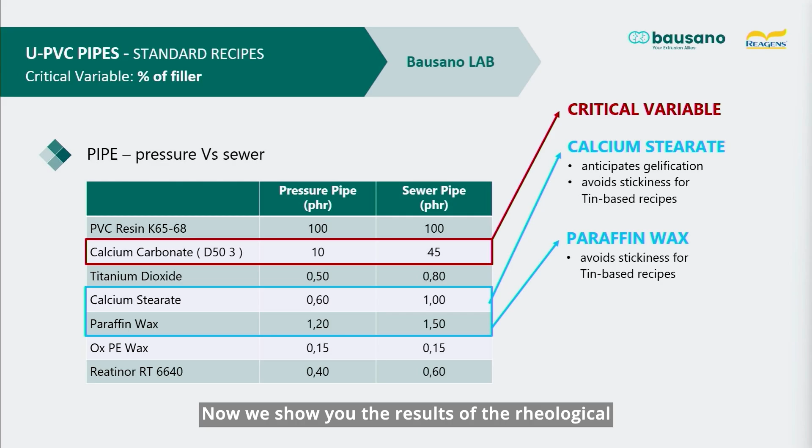Now we show you the results of the rheological characterization through the Brabender plastograph. Here we have in red the graph related to the sewer formulation, and in blue the graph related to the pressure formulation.

As we can see, conventionally the melting time, which is proportional to the melting energy required to get the whole gelation or melting of the material inside the measuring chamber of the plastograph, is the point where the graph changes slope, and the torque value on the Brabender rotor starts decreasing up to constancy.

Here on the vertical line we have highlighted the two melting times in two different cases. As we can see, there is an important gap between the melting time of the pressure and sewer formulations. This difference is due especially to the higher amount of calcium carbonate in the case of the sewer pipe.

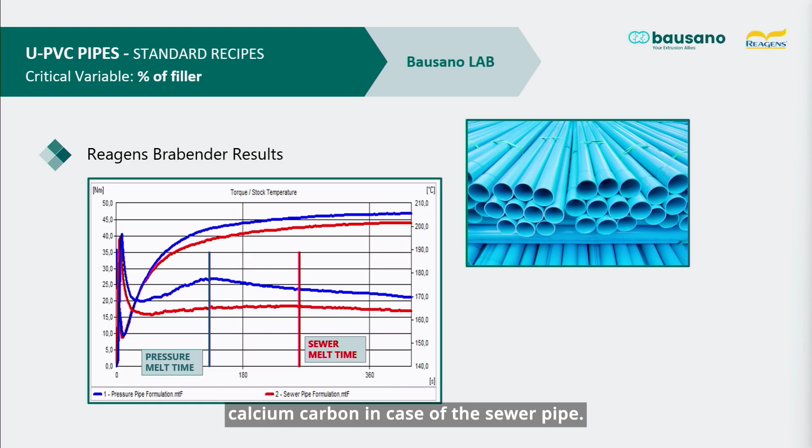Okay Alessandro, I have a question for you. I'm wondering, what is the implication if we have an early gelation or a delayed gelation? Do we get better quality with an early gelation or a delayed one?

This is a good question. Thank you, thank you Giorgio, for this question. Yeah, I wouldn't like to talk about better or worse quality.

In this case, according to the gelation time or gelation energy required from every single specific material, we have to configure a different extruder in terms of barrel length, or in terms of screw design. Usually for higher melting time or energy, we need a longer barrel, and high compression and shear screws.

For anticipated, so for short melting time, usually we use a short L/D ratio and low compression screw. Of course, it can affect the quality when we process the material on the wrong extruder.

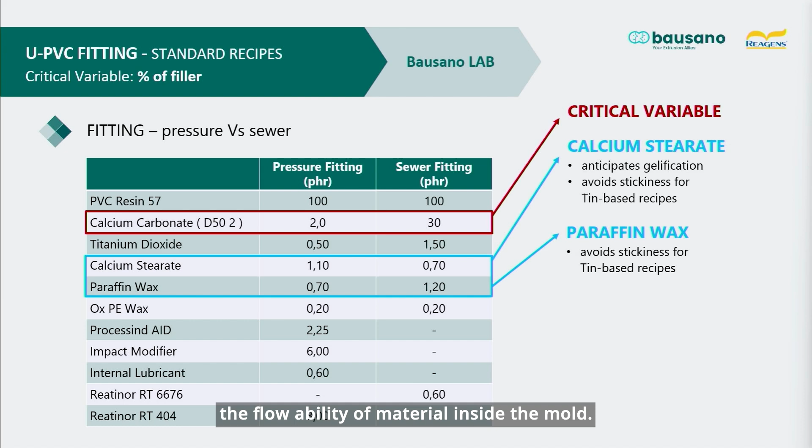Then from the table we see that, together with the usual additives that we also have for pipe, here in this case for fitting we have added impact modifier, processing aid, and internal lubricant, and especially this last one is needed in order to increase the flowability of material inside the mold.

Actually, Alessandro, I have another question for you. Sorry about that. I'm just thinking, if I'm correct, adding paraffin wax and calcium stearate is going to improve the quality in the gelation. But I'm thinking, cost-wise, could this have too high an impact using this kind of additives? This is another good question. Of course, this could be very interesting for the viewers and our customers. Thank you, they are very interested in the cost of formulation.

Of course, adding those additives in a certain amount represents a cost for our customer. But at the same time, those additives allow customers to go on working with the same recipes, for example in this case tin-based stabilized recipes, without any problem of stickiness or reduction of quality of material. And it could be important also in terms of costs, because, for example, they are not forced to switch from tin-based stabilizer to calcium zinc stabilizer, which in certain cases or for certain markets can represent a higher cost for the plant. So it has a cost, but comparing with the cost of changing stabilizer, it's much better. Exactly, thank you.

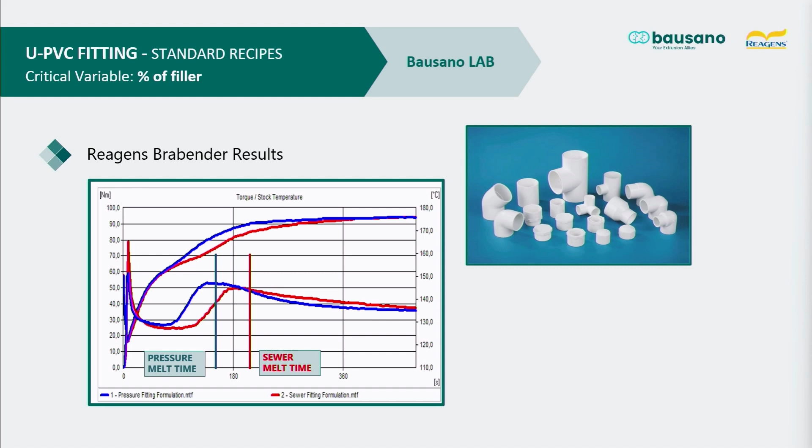Now I give the floor to my colleague here, Andrea Basolo. Thank you, Alessandro. So the next topic of this webinar is another family of PVC compounds: the unplasticized PVC compound for window profiles.

So in this case we have a PVC resin K66. It means that we need long molecular chains because we need good mechanical properties. We have for that a small addition of calcium carbonate, just 10 parts. It means that we need some more stiffness, but we don't want to compromise the mechanical properties of the profile. We have some titanium dioxide to give the white color, and impact modifier, obviously again, to have good mechanical properties.

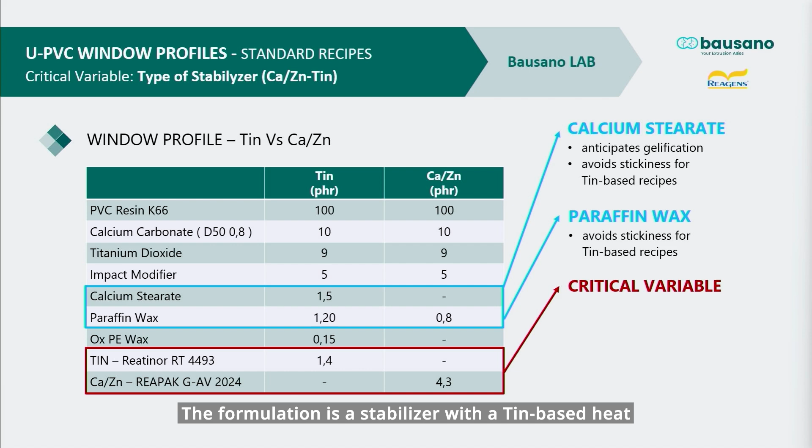But what we found as the critical variable in this case is the heat stabilizer. In the first column, the formulation is stabilized with a tin-based heat stabilizer. In the other column, you see a calcium zinc heat stabilizer. What is different is what you see underlined in blue, the components used for lubrication, because, as Alessandro said before, tin-based heat stabilizer makes the melt more sticky, so you can undergo the problem of the material tending to stick on the screws.

It passes inside the calender gaps between the two screws in a counter-rotating twin-screw extruder, and so the mechanical work is higher. So we need to increase, let's say, the lubricants.

In this case, for example, we add calcium stearate, paraffin wax, and some oxidized polyethylene wax. In the other case, with the calcium zinc heat stabilizer, we work on a one pack, meaning that, as the name says, in one pack you have the calcium zinc stabilizer and all the lubricants. In this case we have a small addition of paraffin wax, but with just one component you can replace 4 components. It's also easier while mixing all the powders.

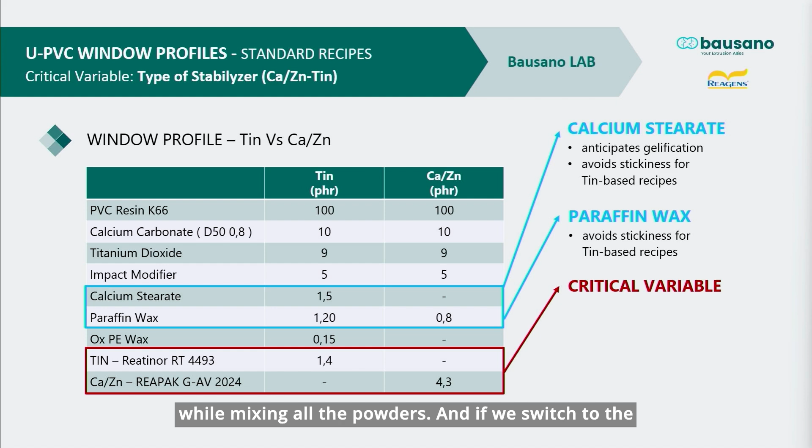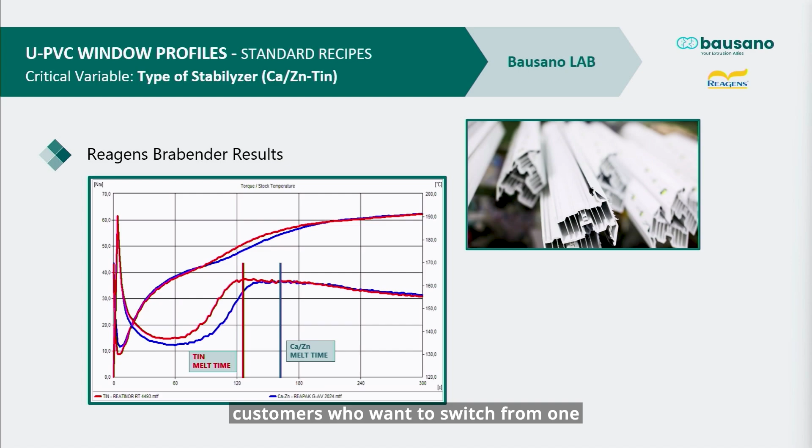If we switch to the other slide, in which we see the Brabender results, we have a gap between the two vertical lines. This means that with calcium zinc, you have a slightly longer time needed to completely plastify the material. But if you look at the shape of the curves, it's similar, and that's quite obvious because the formulation is made for customers who want to switch from one compound to the other without changing the screws.

Obviously, if I am a producer of profiles, I would like to work all the formulations on the same machine. That's why the formulations are pretty similar. Now we switch to another field, that is the medical field.

One, the DOP or DEHP, which, let's say, in some fields can still be used, but there are many and many restrictions every year because it has been found to be harmful for human health.

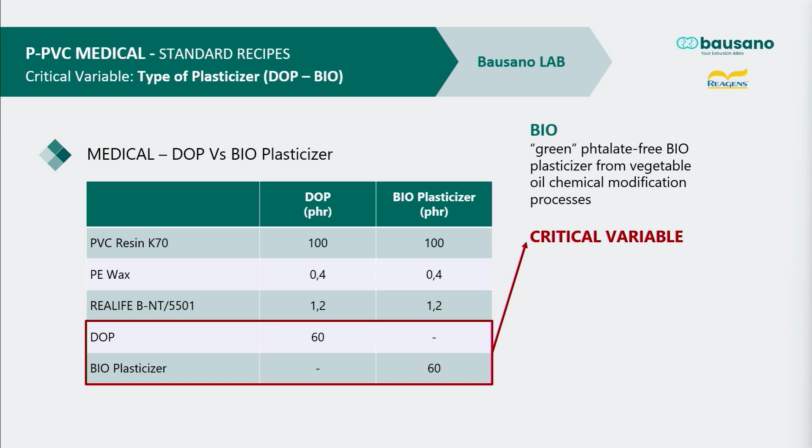BIO plasticizer is, let's say, a derivative of epoxidized soybean oil, but with some modification to the chemical structure in order to avoid one of the main troubles we have with soybean oil, that is the exudation when high concentrations are reached. And so that's why we have this comparison.

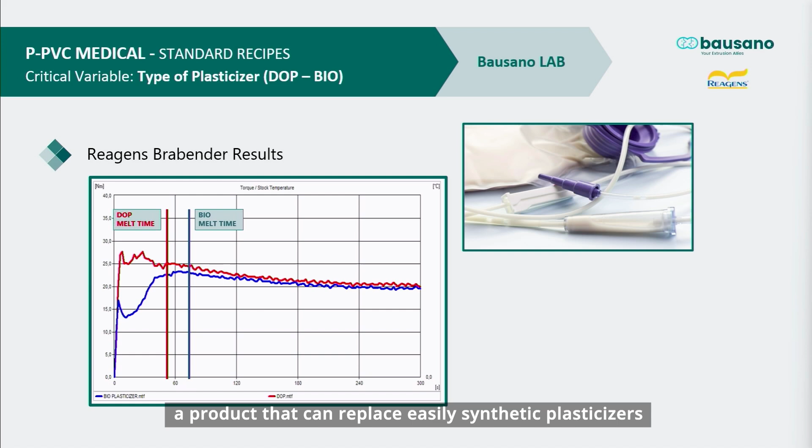Also in this case, if we see the comparison between the Brabender graphs, we see that the melting time is slightly higher with the bioplasticizer, but again the difference is not so high, because this plasticizer has been thought of as a replacement, also as a green replacement—one whose production does not rely on oil and so on. So the aim is to make a product that can easily replace synthetic plasticizers without significant problems for the producer. So again, I leave the floor to Alessandro, and we go on with some conclusions.

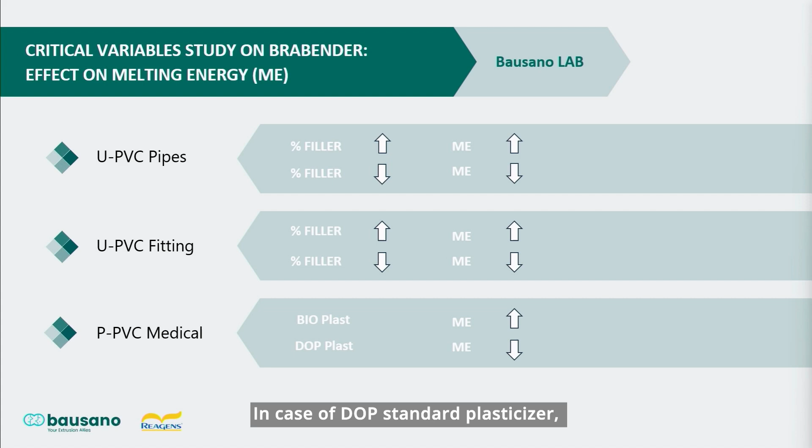For UPVC fitting, basically we have the same trend: the higher the percent of filler, the higher the melting energy required to get proper gelation or melting of the material. In the case of plasticized PVC medical, we have a direct correlation between the kind of plasticizer used and the melting energy, because the plasticizer is the only variable that affects it, if you remember the formulations. With the bioplasticizer, we have a higher melting energy required to reach full gelation of the analyzed samples. In the case of DOP standard plasticizer, the melting energy decreases.

Now let's talk a little bit about the Bausano method.

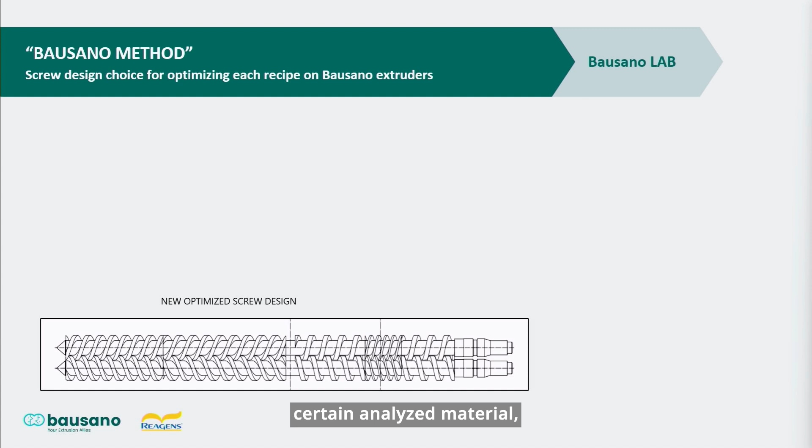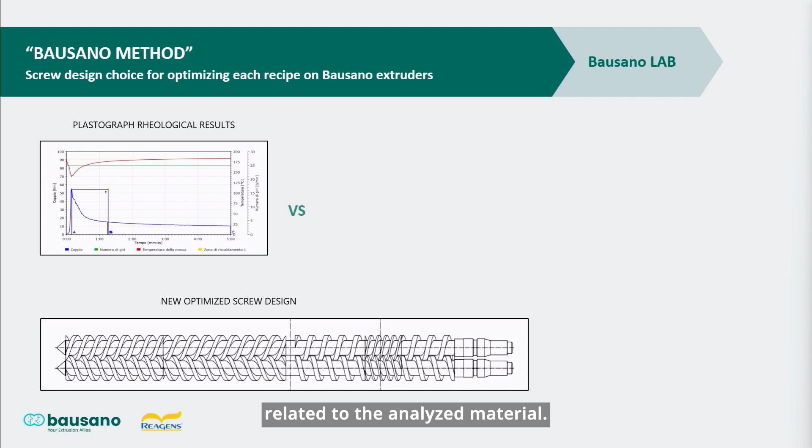When we have to configure a brand new screw design for a certain analyzed material, we start from the Brabender graph related to the analyzed material. Then we check all the screw designs that are already existing in our huge database, because it's really huge. We're talking about more than 75 years of experience of Bausano, maybe even more. We have our database full of different screw designs.

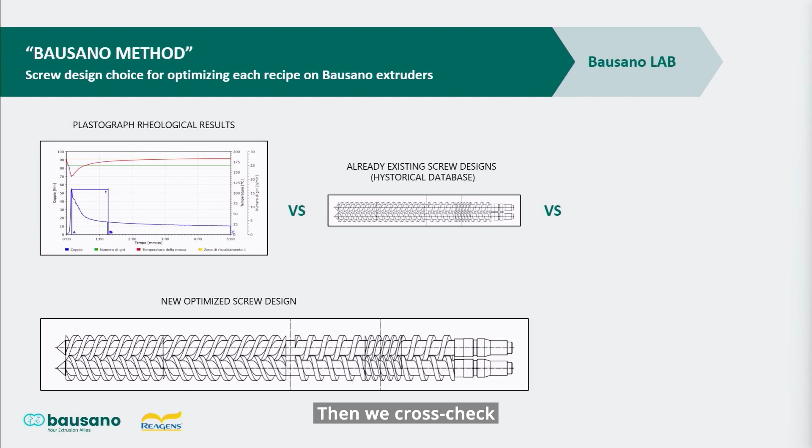Then we cross-check this database with the feedback that our customers gave us relating to the material that they usually process on our screws. From this cross-analysis, we obtain the new screw design.

We give you an example. For example, we have to configure a new screw design for a new material, let's say a pressure pipe dry blend. What we do is compare the rheology obtained through the plastograph of this material with the results obtained on similar materials of the same family.

Then we check what are the best already used screws with the comparing material, and according to our analysis we configure the new screw design. For example, we can decide to use exactly the same screw design as the reference material, or maybe the reference material is characterized by a lower melting energy, and in this case I can decide to increase the shearing of the screw or increase the compression of the screw, changing the screw geometry.

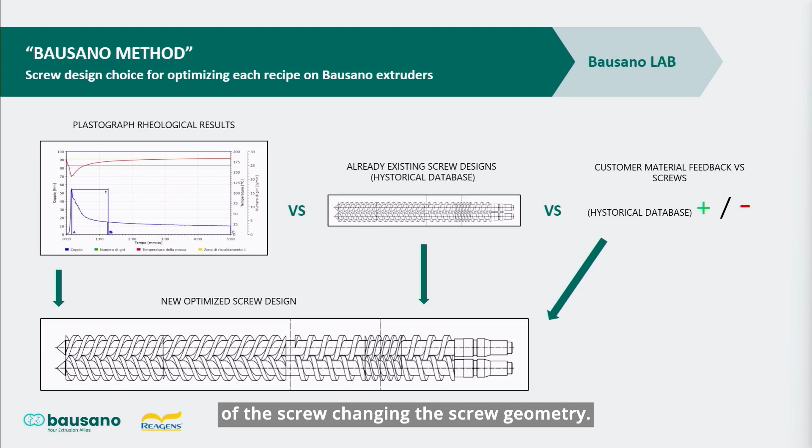Now we show you what we obtained for the 4 recipes during the trials on the lab scale extruder MD30 in our Bausano lab.

We detected the first screw model A13 as the best screw on the lab scale extruder configured for a rigid pipe recipe. This screw is characterized by 2.2 as maximum compression ratio before degassing and 1.4 as compression ratio after degassing in the final metering part.

For rigid fitting and rigid window profile recipes, we found the screw model 802, characterized by 2 as compression ratio before degassing - a little bit lower - and 1.2 in the metering, as the best screw design that we have in our lab for those 2 recipes.

In case of flexible medical recipes, we know that this material has a lower melting energy required to get the proper gelation compared to all the others, and this result is in line with what we've checked in our lab. The screw required for this purpose has the lowest compression ratio, 1.7 before degassing, and lowest as well in the metering part.

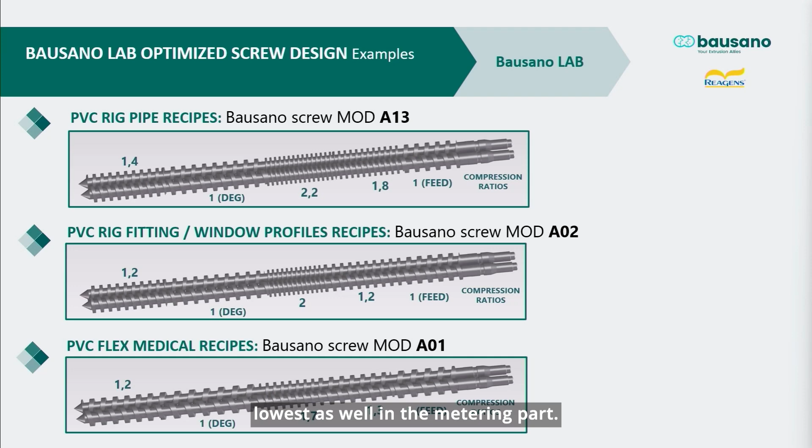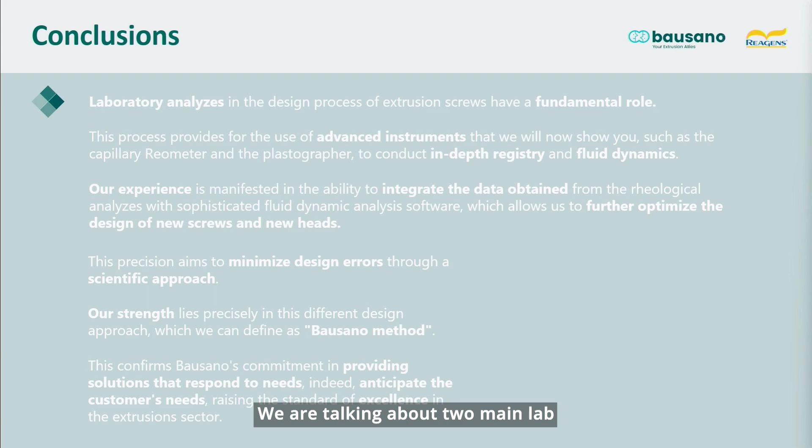In conclusion, what can we say, Andrea? We can say that, as we mentioned before, the rheological analysis of material plays an important, fundamental role in the definition of the optimized screw design. We are talking about 2 main lab equipment for the rheological analysis. The first one is the rheometer.

Why do you smile? Nobody told me. And the second one is the Brabender plastograph.

The output data from those tools are used not only for the direct screw design definition, but also as input data for the software simulation that we are able to make on the material, according to the geometry of single screw and die that are simulated on our simulation software.

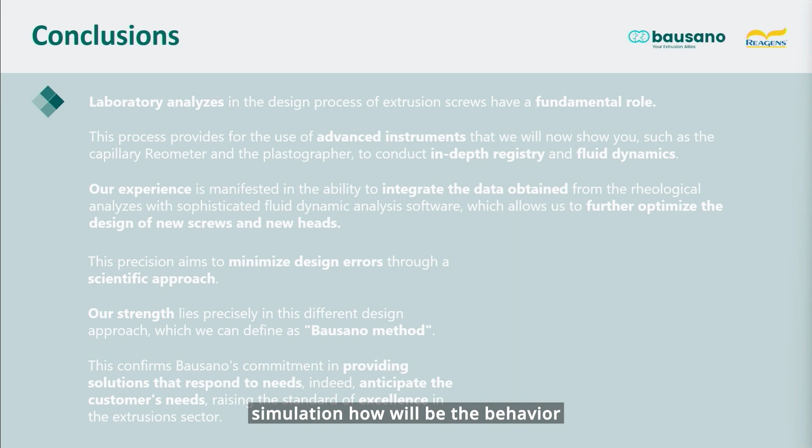So through this analysis on the material, through the rheology of material, we can predict through the software simulation how the analyzed material will behave on a certain screw and die geometry, in terms of temperature, overheating, shears, and so on.

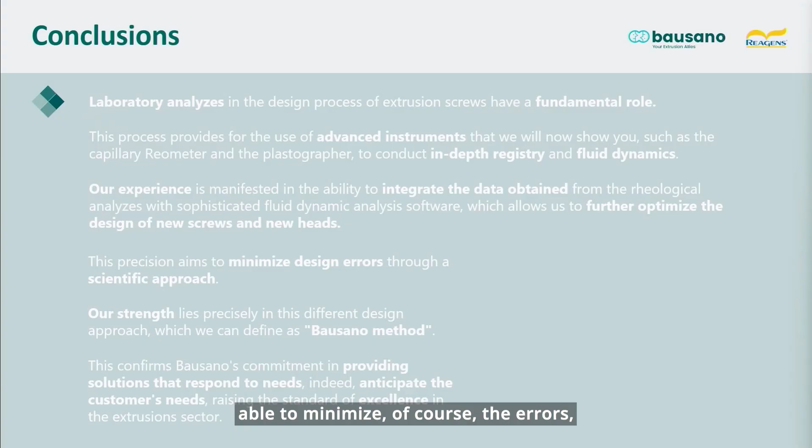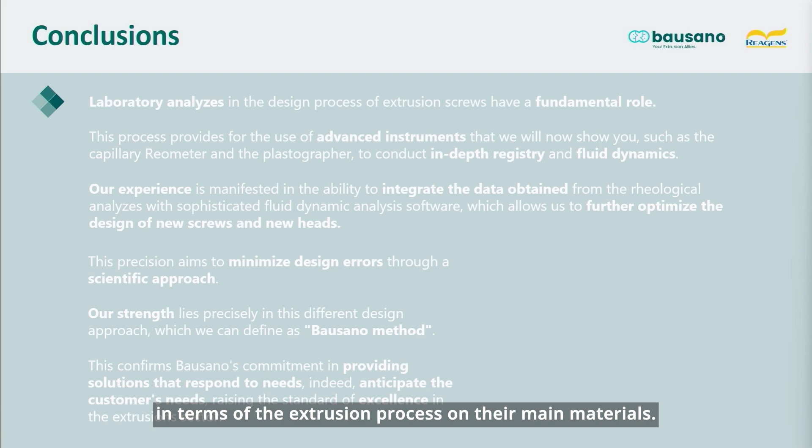Through this method, we will be able to minimize the errors in facing all the customer or user issues and needs. And even more, we are able to anticipate the customers' and users' needs in terms of extrusion process on their main materials.

Now I give the floor again to you, Andrea. Okay, it's your turn. Thank you. You're welcome.

We talked about the Brabender plastograph. We talked about the capillary rheometer, and now it's time to speak about it in more detail.

The Brabender is known by, I think, everybody who works with PVC. The plastograph is a machine with a mixing chamber in which two screws rotate in opposite directions, and the mixing chamber is heated at a certain temperature decided by the operator. The machine has a sensor on the shaft that collects the data of torque as a function of time, and gives the curves we saw before during this webinar.

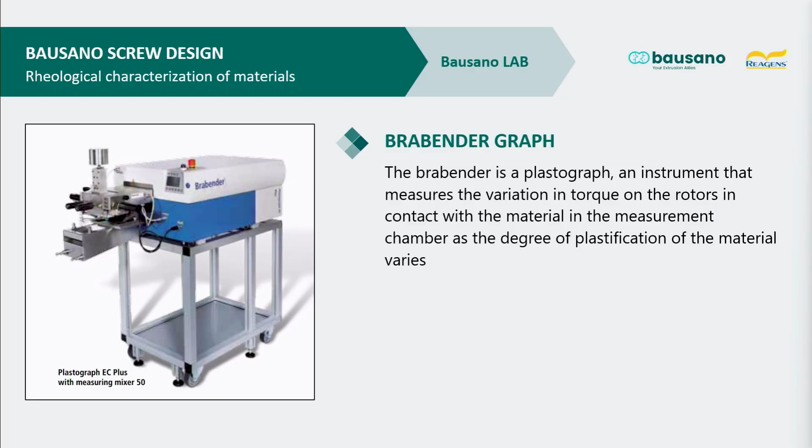The other machine we have here in the lab is the capillary rheometer. That's a machine able to give the viscosity of the material as a function of the shear rate. It's a characteristic of the material that depends on the shear rate. So for higher shear rate, viscosity is lower, and also on temperature, so for higher temperature, viscosity is lower.

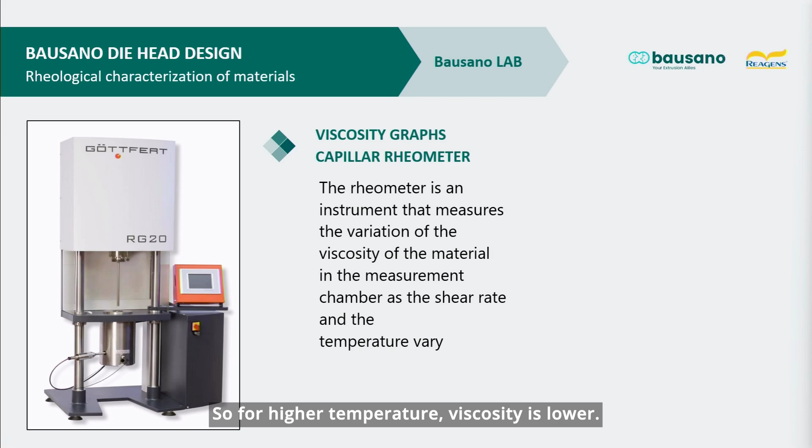So what is done is to make three curves in general at different temperatures, to see this dependency. And then these viscosity curves appear on a logarithmic graph scale. We can use this data for mainly two applications.

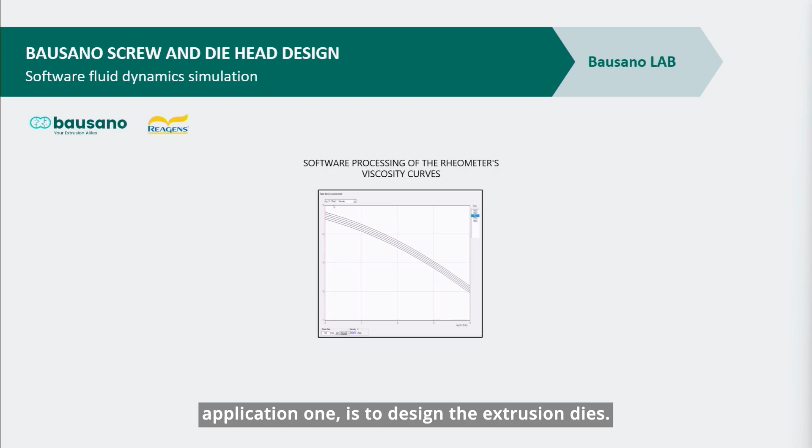One is to design the extrusion dies, and so we have software able to make simulation of computational fluid dynamics, and so we can see how the material, pushed by the pressure built up by the screws, moves inside the die. We can see, for example, if we have zones in which we have stagnation, that is harmful for PVC. PVC must move forward always, otherwise it burns. So it's better to be sure that the die is designed correctly.

The other application is to model single screw extruders. So we have software that are able to see a lot of parameters like shear rate, temperature, viscosity, and so on along the screw axis. And so again, it helps us in the design of the proper screw geometry.

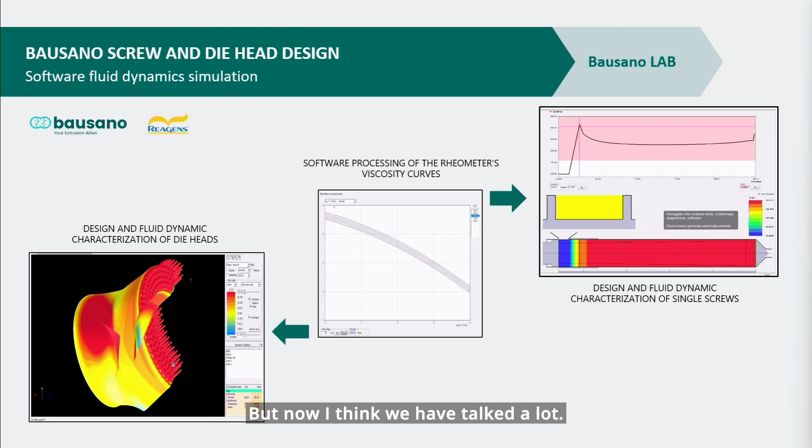But now, I think we have talked a lot, so let's see something practical. I will show you how to work on the Brabender. So this one, as you see, is the Brabender. We will charge the material inside the hopper and see what happens during the test.

So the material we will use, I will speak to you later about it. We are working at 25 RPM of screw speed, and the mixer temperature is 182 degrees.

So we can start the measure. The temperature is good, so we can start. Then the machine takes some time to make the calibration, to be sure that the measured torque is correct.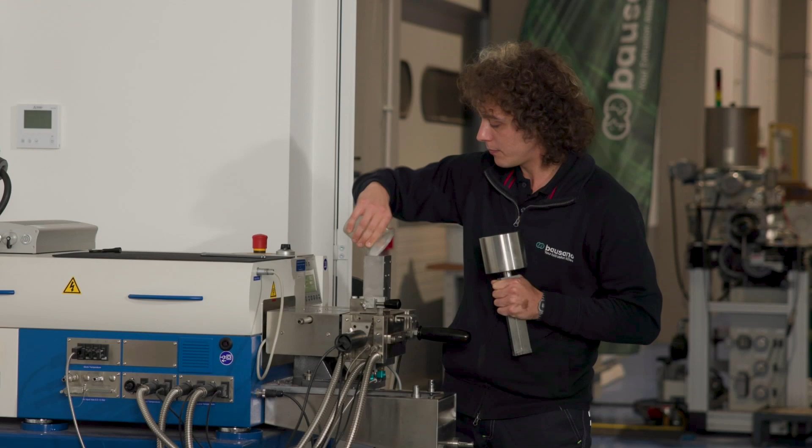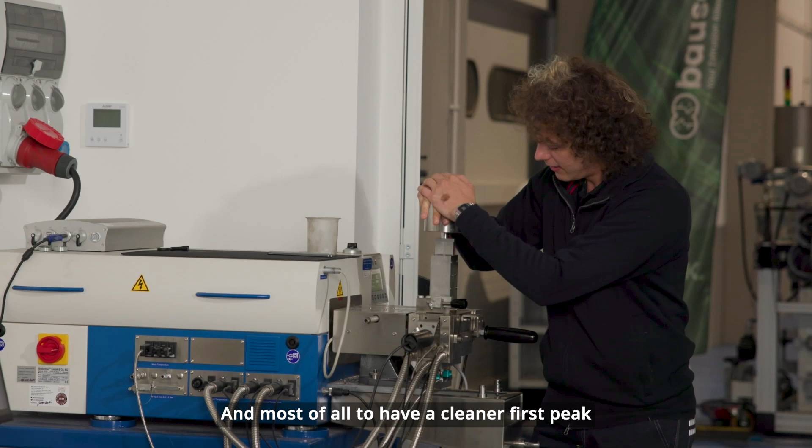Then we will pour the material here inside the hopper and then put this plunger, and then the machine works automatically, and in 5 minutes, that is the time of this test, we will see the results. So we pour the material, we put the plunger, and we push a little bit just to help it enter completely inside the chamber, and most of all to have a cleaner peak, a cleaner first peak. Later we will see what that means.

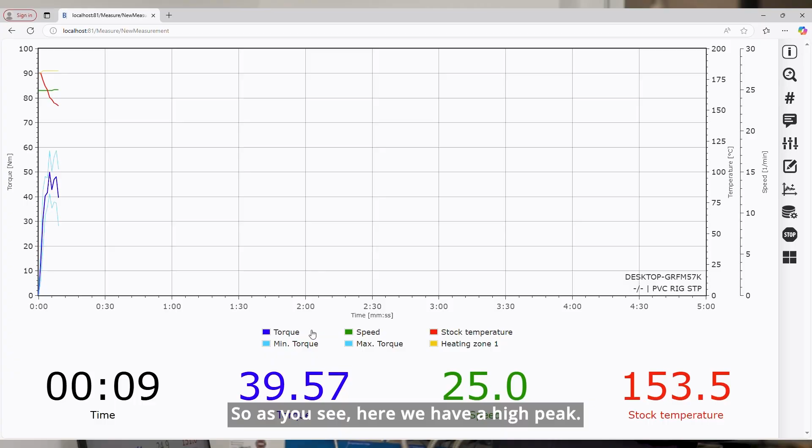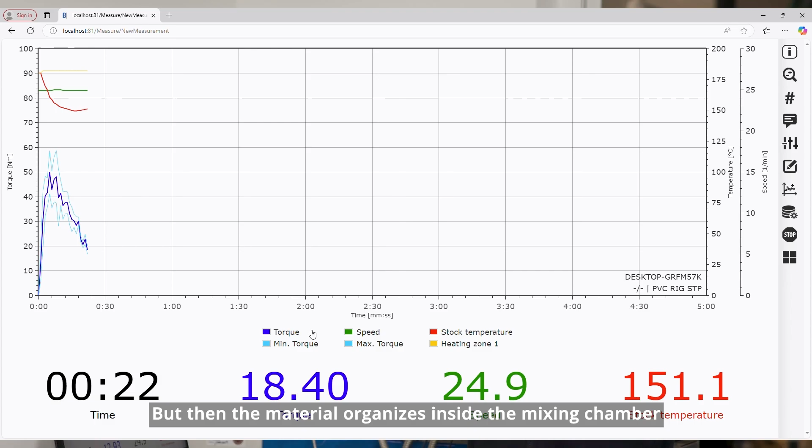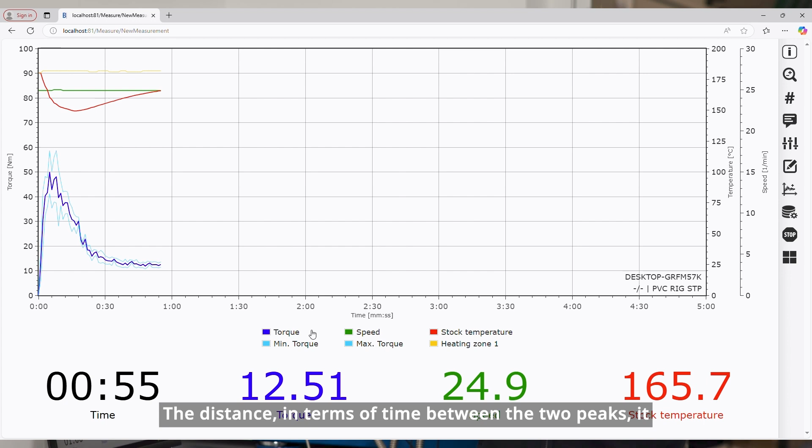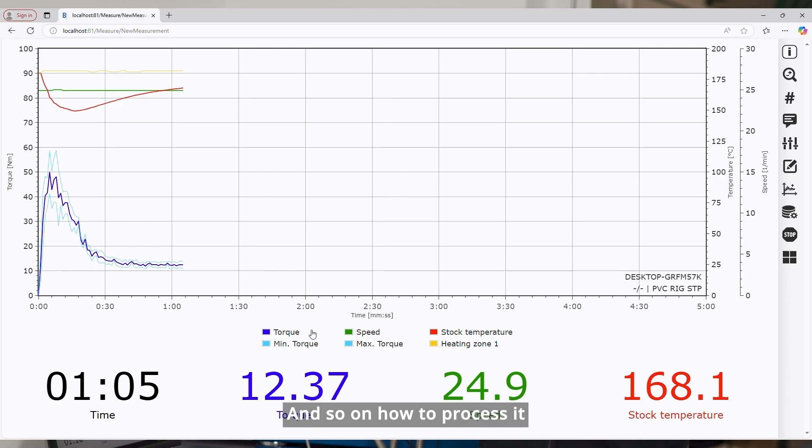Okay, here we are, that's good. So as you see, here we have a high peak. That means that when you put the material, which is solid, inside the mixing chamber, torque increases. But then the material, let's say, organizes inside the mixing chamber, and it leads to a decrease of the torque, that I think you are seeing now also live. After that, after a while, depending on the characteristic of the compound, the torque starts to increase again, and then it stabilizes on a certain value. The distance in terms of time between the two peaks gives an indication on the behavior of the material, and so on how to process it when we will need to extrude it.

Some things about this material: it's something we use to clean the extruders. It's a PVC K67, and in the compound we also have calcium zinc stabilizer as one-pack in very high concentration, something like 15 parts, which is really high. It means we will also have, since we use a one-pack, a high quantity of low molecular weight lubricant that affects the gelation of the material, shifting it to very long times. In addition, we have 30 parts of calcium carbonate, so we expect to see a material that at this temperature does not gelify completely, because it's very highly lubricated and very highly filled.

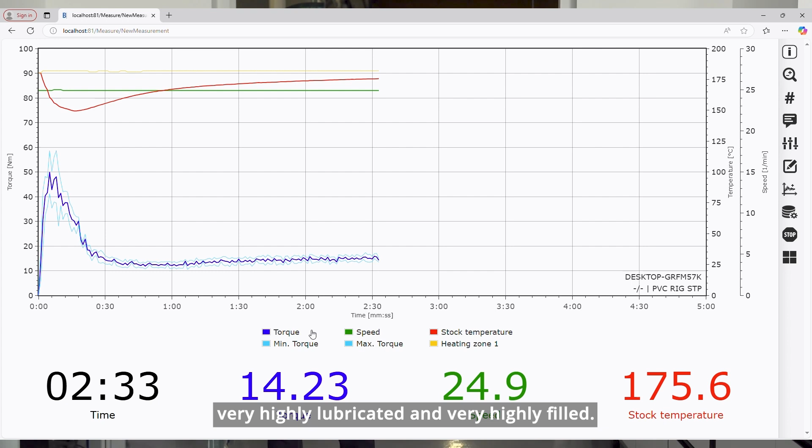And so, as we saw, these two parameters tend to shift the second peak to longer times. Now in two and a half minutes we will see what happens, but I know I made a spoiler. Meanwhile, let's see also something about the capillary rheometer. As I said, capillary rheometer is... no, I didn't say anything about that.

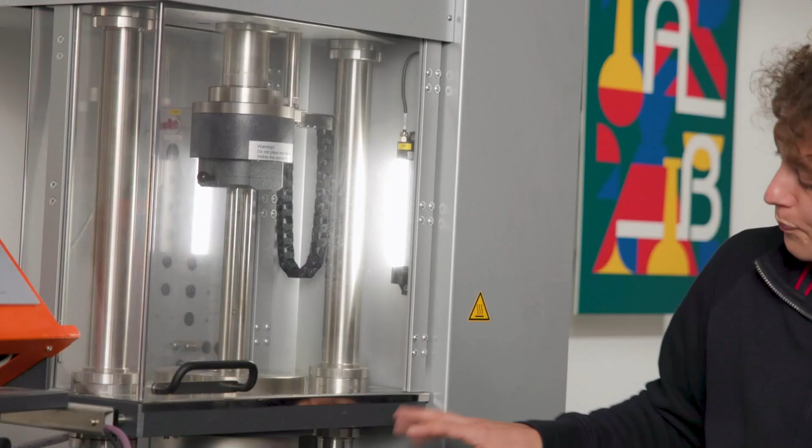We have two chambers here inside with two pistons. The pistons enter inside the chamber where the material is poured before the test and heated for a while. Then the pistons move at constant speed, and the speed varies during the test.

Then when the steady state is reached, the data are collected. Data that are in terms of pressure. So here we have 1 and 2 pressure transducers that measure the pressure here inside the two chambers.

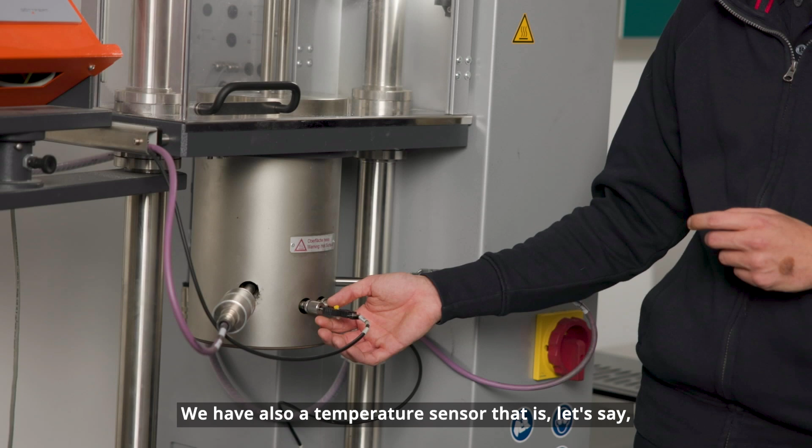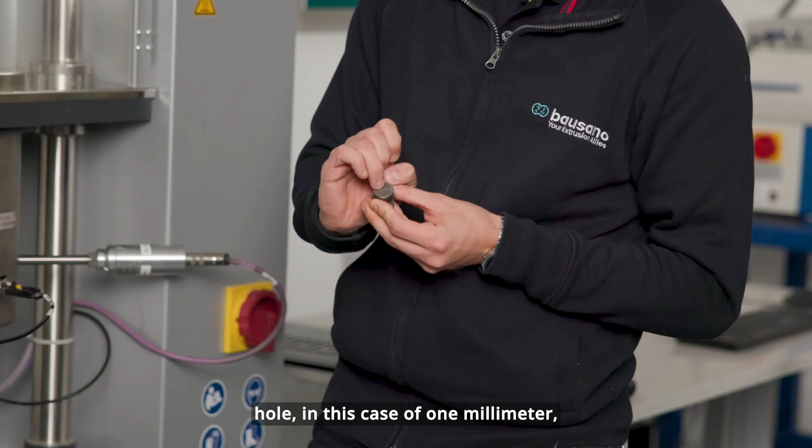We also have a temperature sensor, because we needed to know the temperature of the capillary, which is this metal part, that has a calibrated hole of, in this case, 1 millimeter, and a certain length that in this case is 10 millimeters.

If we make a measure with this rheometer, the value we will get is of apparent viscosity. So it's not, let's say, the true viscosity of the material, but it's a value that depends on the geometry of the machine, of the testing machine, and of the capillary we are using.

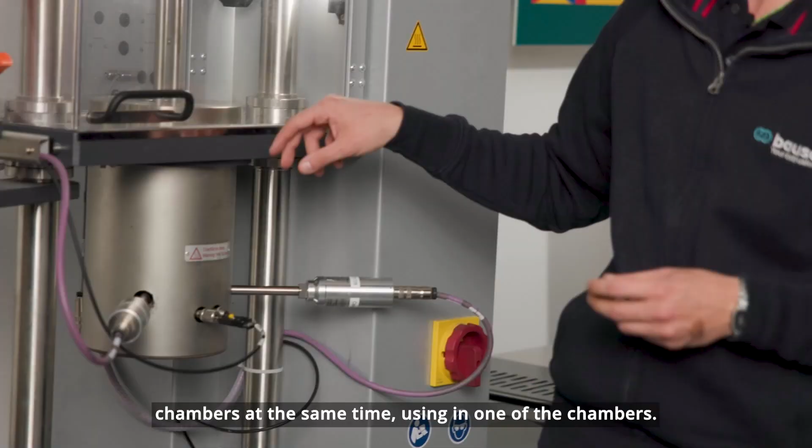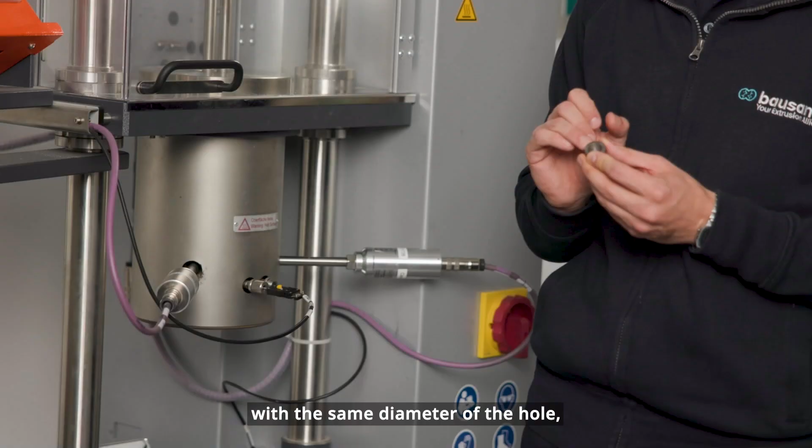So to avoid this problem, the test is done with the two chambers at the same time, using in one of the chambers one capillary with a certain length. In the other chamber, we use a capillary with the same diameter of the hole, but with a length that is more or less zero. It may be 0.1, 0.2 millimeters, but it is as much as possible close to zero.

In this case, with the Bagley correction, we are able to remove the effects due to the geometry of the chamber, as I said, and have what we call the true viscosity of the material. That is the one we use for what I explained before, for the designing of dies and screws.